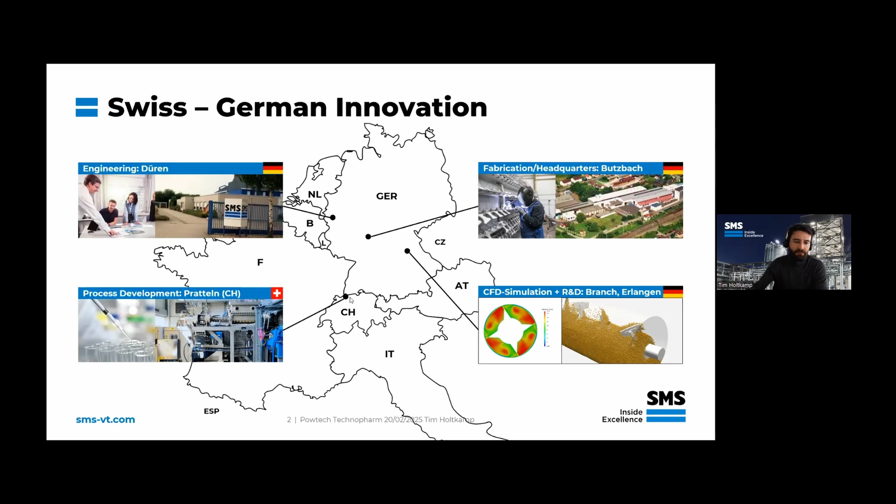That's where I'm located, where we have our process development. There we have our own laboratories where we can perform laboratory trials with our customers. We have even bigger metal pilot plants where we perform pilot trials for scale-up and further feasibility testing, and in addition, a partner lab where we can make analysis, as well as CFD and DEM simulation for accompanying analysis.

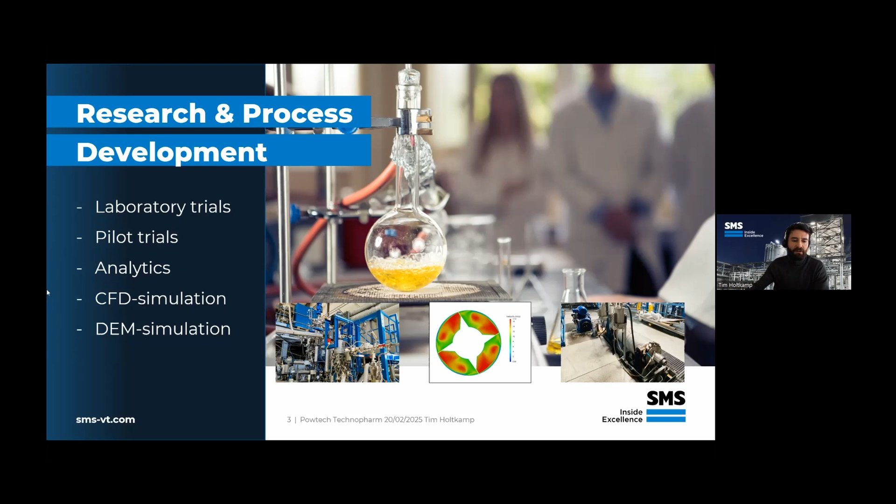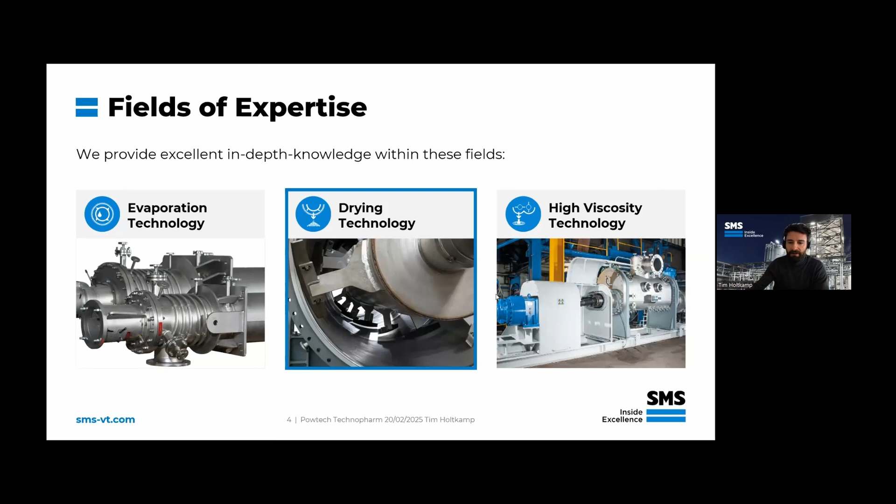We are also active in process equipment for evaporation technology with our thin film evaporators, and with equipment for the treatment or processing of polymers. But today we look at this drying technology, which is called contact dryer.

Since I think just a few people will know this technology, we will first look at the physics of it. Most of you probably know the kind of dryers you see here on the right side, similar to what Markel Alberdi from Econec just presented to us - the so-called convection dryer. This is a dryer you all know from everyday life - when you come out of the shower with wet hair, you take your hair dryer and blow hot air over your hair. The hot air saturates with water, the hair becomes drier, and then the wet hot air leaves the system. So this is a classical convection, or convective, dryer.

On the other side, on the left, you see our drying systems. We call them contact or conductive dryers. They do not use air at all - there's no inert gas here. What we have is the wet product brought into very close contact with a heated wall, for example a double-jacketed machine with thermal oil or steam in it. The heat is transferred through the wall by conduction into the product. The product heats up, and then the water, for example, starts to evaporate. Inside the dryer, we just have pure vapors and nothing else.

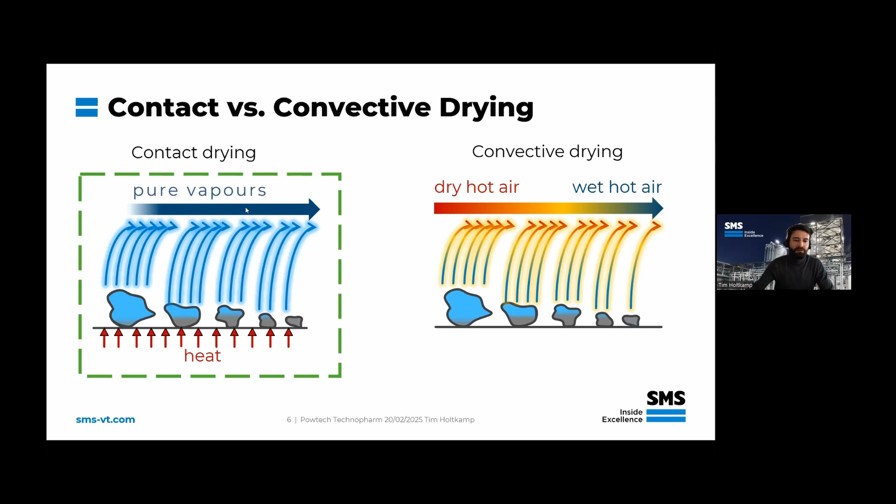So this supposedly small difference really has far-reaching consequences, and I will explain these consequences to you later.

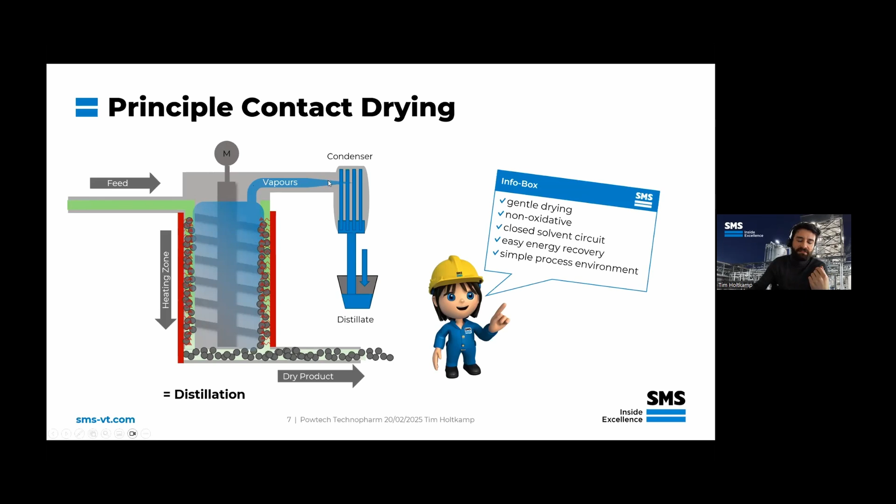Just to give you an impression of how a setup can look: with a contact dryer, we have, for example, a thin film dryer - a cylindrical machine with a double jacket where thermal oil is circulating. We have a feed nozzle where the wet product is pumped in, and an agitator that presses the wet material against the heated wall and pushes it down slowly, where it dries and then leaves at the bottom. The vapors go counter-currently in the other direction and can be externally condensed.

In both cases, you can try to recover energy. In our case, we can recover the latent heat completely, nearly completely, and also we have the full recycle of the solvent that we have just evaporated. This is only partially possible with convective dryers.

I looked into the literature and found the Bible of drying technology, K. Kröll's Trocknungstechnik, second volume, page 536. Here I found the complete energy balance, and you can see the streams for a convective drying system.

I took these values and simulated the same for a contact dryer to compare these two worlds. What I figured out is that the energy consumption in the convective dryer is approximately 14% higher, which is not as much as I expected, but it's still there, this difference.

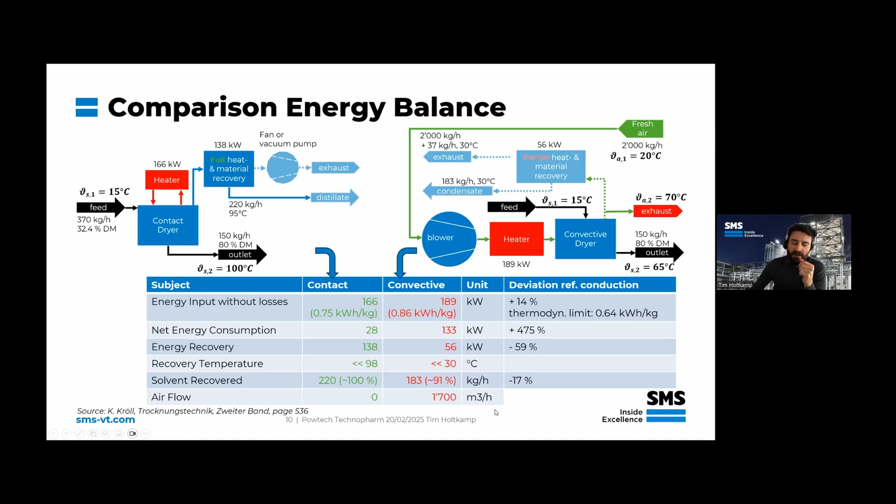In addition, we have this big stream of 1,700 cubic meters per hour of air, which is not present with our dryers. So how can we recover this energy? That's the big question of energy recovery.

We can implement our dryers in many ways. First of all, the vapors can be directly used, they have 100 degrees boiling point of water at atmospheric pressure, for example. So you can condense them anywhere, or condense them in a mixing condenser and then use, for example, 95 degrees Celsius hot water to preheat something elsewhere in your plant.

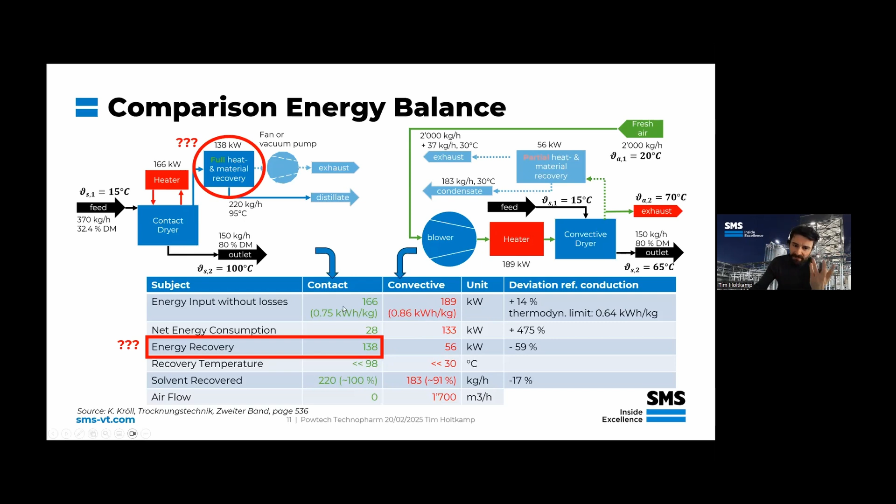But what I also wanted to tell you, which I think is very interesting, what is the future, because it can help you electrify your process, is using a heat pump. For example, on the left side you can see an open loop heat pump, or mechanical vapor recompression. You use the steam that comes out of the machine, maybe just part of it, and compress it with a fan or blower to a higher pressure level, for example to 160 degrees. Then you can use it self-sufficiently to heat your own dryer.

We have not yet done that actually, but I'm very open to talk with you about that. If you have possibilities or want to go this way, we are very open to go one step further into this future.

But you can also use, if you want, a closed cycle heat pump, the classical heat pumps you know from your homes, where your vapors are condensed inside the heat pump, and then in a secondary circuit you can use the pumped up heat for your own dryer or for somewhere else.

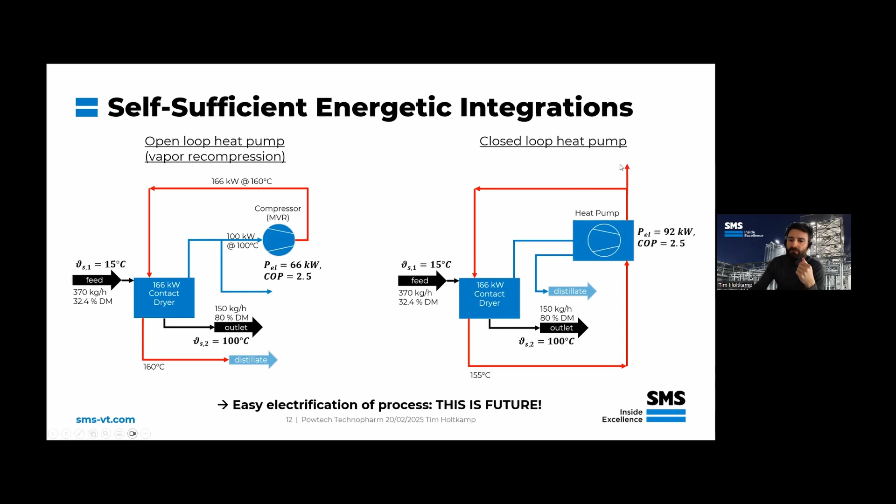So I've found two rules of thumb that can be applied when you want to validate the use of a self-sufficient heat pump system. I would say they pay off faster the smaller the dry matter amount is in your mixture that you feed into the dryer, and the further below 1 the ratio of price per kilowatt hour of electric to fossil energy is, including CO2 taxes, divided by the COP of the heat pump. That's so complicated, that's why here's the formula.

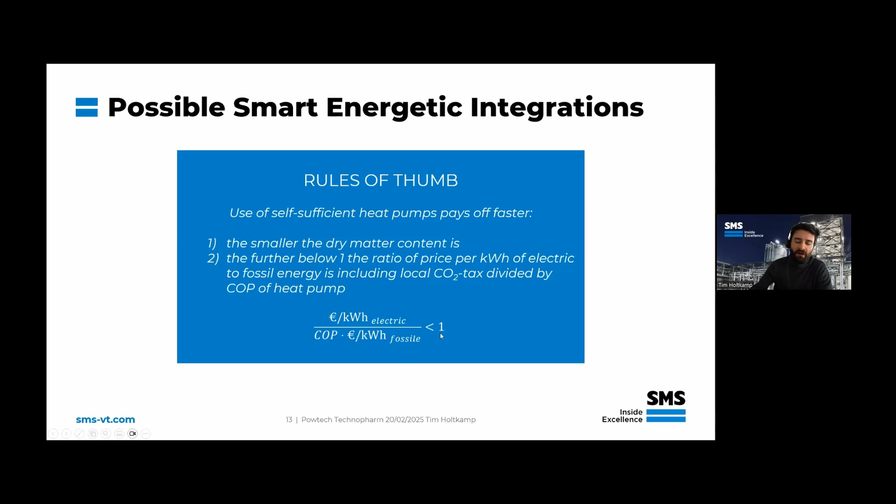Just divide the price for electric energy by the price of fossil energy. For example, this can be 2. Then you divide by the COP, the coefficient of performance of the heat pump, which, for example, if this value is 2, the whole ratio gives 1 — this would be the critical point where you'd say this doesn't make sense. But if the COP is bigger, which is very probable, then we are below 1, and you can really look deeper into this topic.

To summarize, our machines or dryers are a little bit like a distillation plant, like an evaporation system. So for us, it's very easy to have a vacuum process to lower the boiling point and make the process more gentle. We don't have oxidative stress because we don't have air inside our system. This makes the system pretty simple, pretty compact. The energy consumption is very good, and energy recovery is high at a high level of temperature.

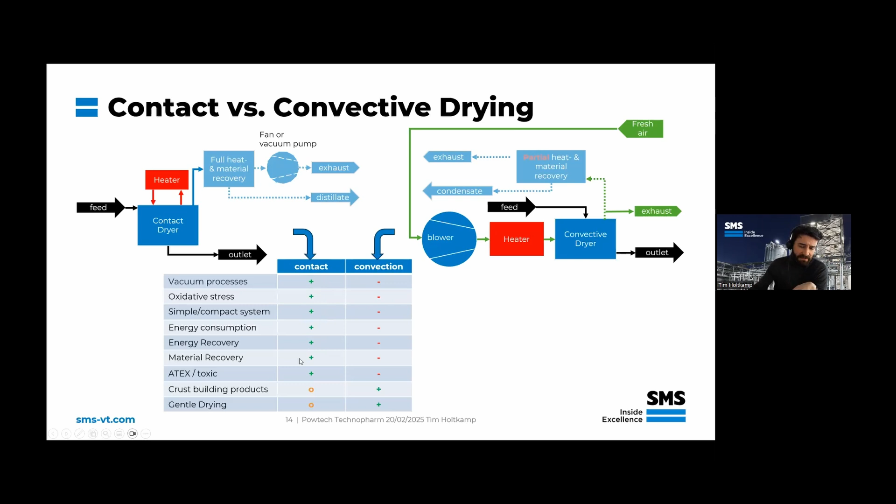Material recovery, so closed solvent circuit is nearly 100%, so that we can meet ATEX requirements or really toxic solvents or whatever is inside your product.

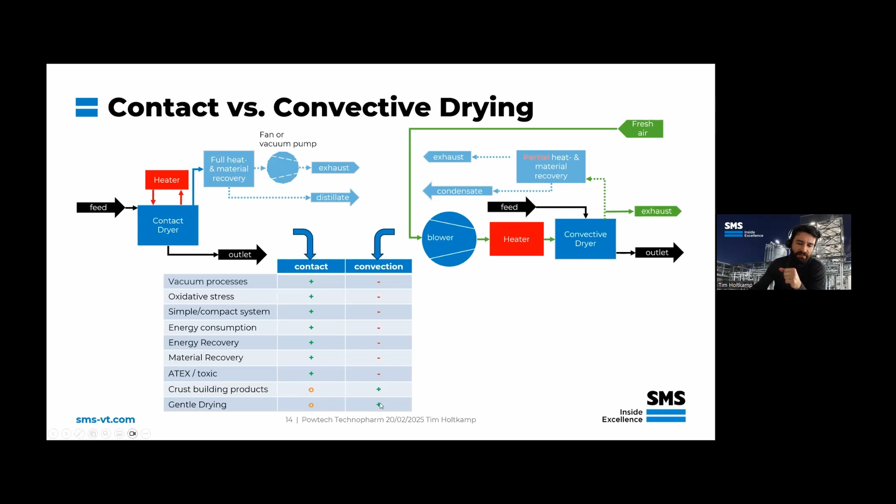Some neutral points, I would say, sometimes we have problems with crust forming products. Here I think convective dryers are much better. But we have also invented a very good solution to meet this problem, which I will show to you later. And in its very basic configuration, I think a convection dryer is a little bit more gentle with regard to the product temperature.

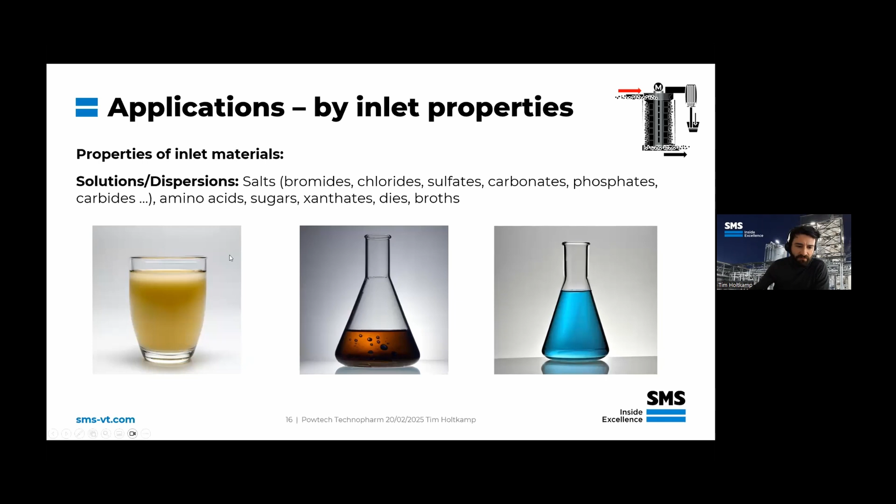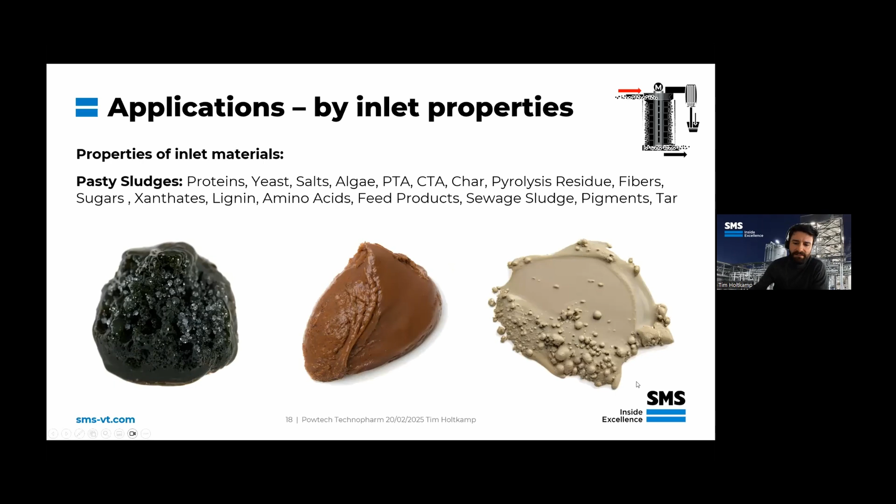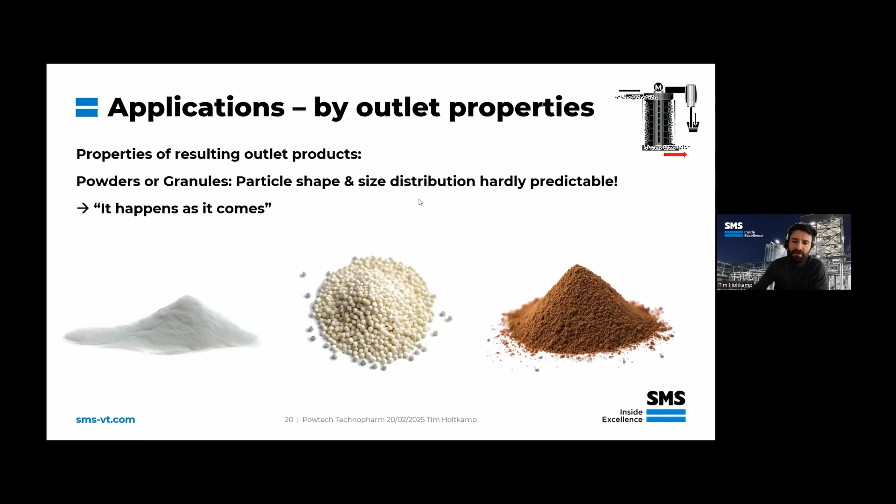So let's come to our dryers and the application of our dryers. We can feed into our dryers actually anything, everything you can imagine. So we can feed solutions, light solutions or dispersions that are completely liquid. We can feed liquid but pumpable slurries, no problem. But the critical things are then the pasty sludges. We can also, without any problem, feed them into our dryers, and they are then further dried, but also wet powders. And then what you get out from our dryers are in the end powders or granules. But unfortunately, we don't have really the control over the size and distribution of the particle size. We always say it happens as it comes in the end.

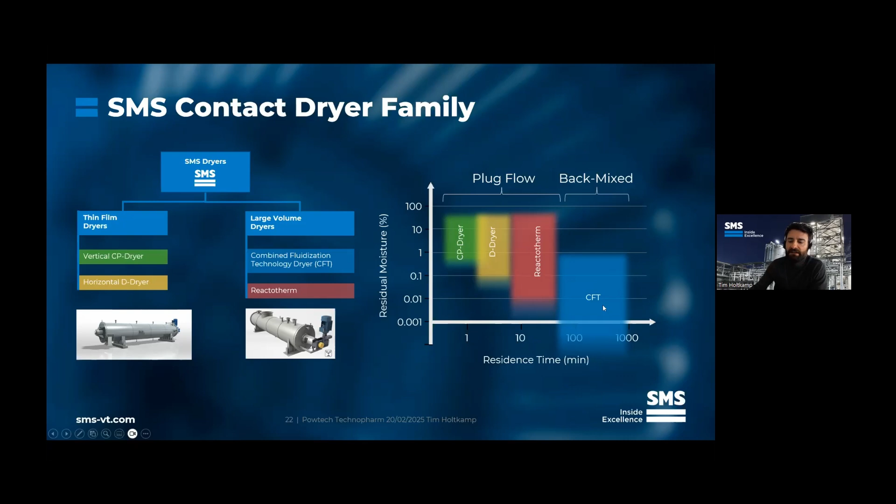The vertical and the horizontal thin film dryers have very short residence time and plug flow-like behavior. So residence time inside the dryers is really either a couple of seconds or just a few minutes. On the other hand, the CFT dryer is a backmixed dryer, so no plug flow-like behavior. Here we have residence times that exceed some hours.

Let's have a look at the low hold-up dryers, the thin film dryers. You can see here in the background a picture of the rotor of our vertical CP dryer. It's characterized by a flap rotor or pendulum rotor, as we call it. This CP dryer is very good for crystallization, for salt solution evaporation with sudden phase transitions. And we can feed into this machine liquid to light slurries.

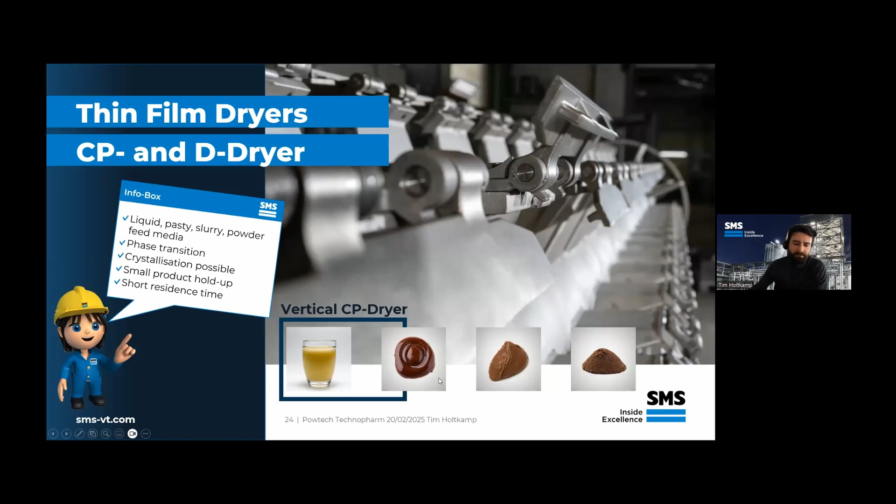On the other hand, we have our general universal weapon, our horizontal D-dryer. This can be fed with everything that is also liquid, but mainly pasty and dry powder, wet powder.

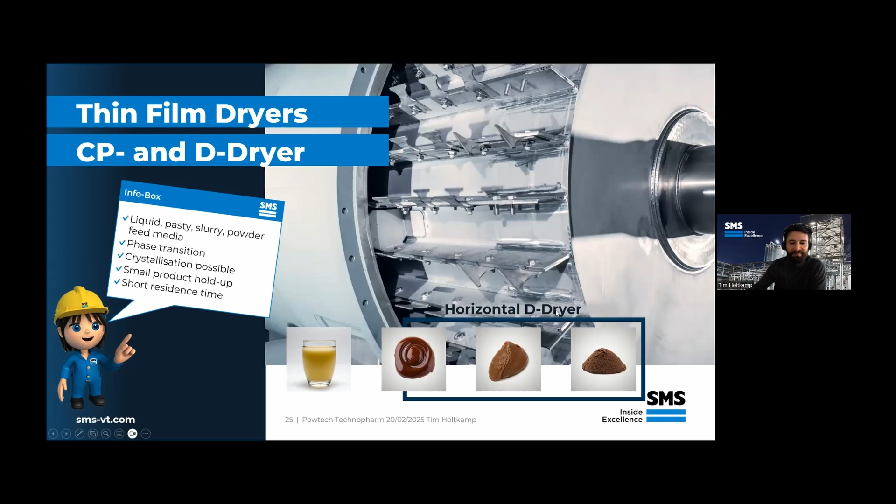The setup here, in this case, a horizontal D-dryer, is a classical distillation setup. You have the horizontal dryer with a double jacket, heating medium inlet and outlet. We have the feed, which can be realized with an eccentrical screw pump or a twin screw or a single screw. And the product will be fed into the dryer. The rotor takes it up and then pushes it to the right, and then it will be dried and falls out of the dryer with a rotary valve or a gate valve.

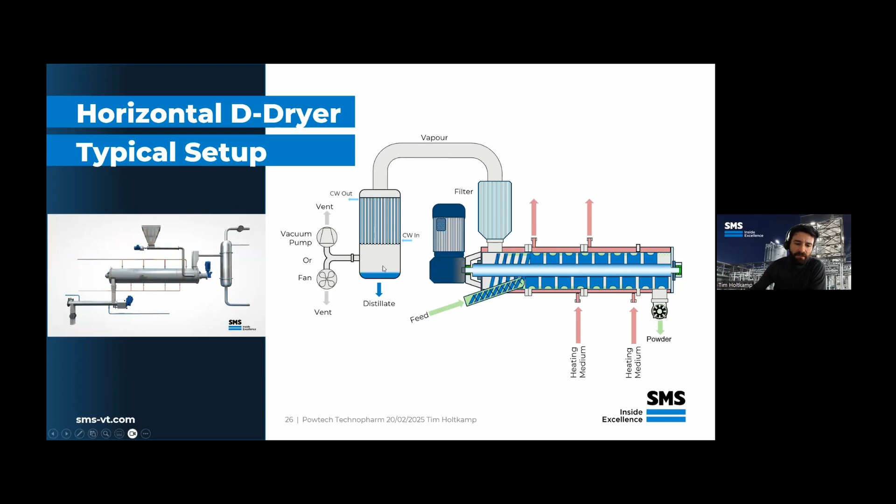Counter currently, the vapors will leave the machine, for example, through a dust filter, and then the vapors can be 100% condensed in a condenser. The same is true for the vertical machine, but just that the machine is vertical, so feed goes in the top and leaves dry in the bottom.

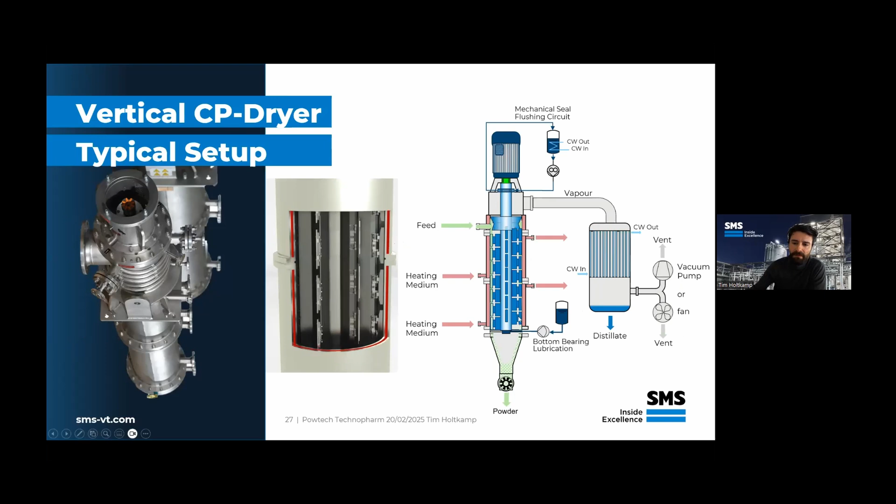The working principle of a thin film dryer is actually pretty simple, because the name already tells you that the rotor inside the dryer will form a thin film on the double jacketed internal of the shell, and then the heat will penetrate the metal, penetrate the product. We have here a remixing situation in front of the rotor blades, and then the product will heat up and start to evaporate.

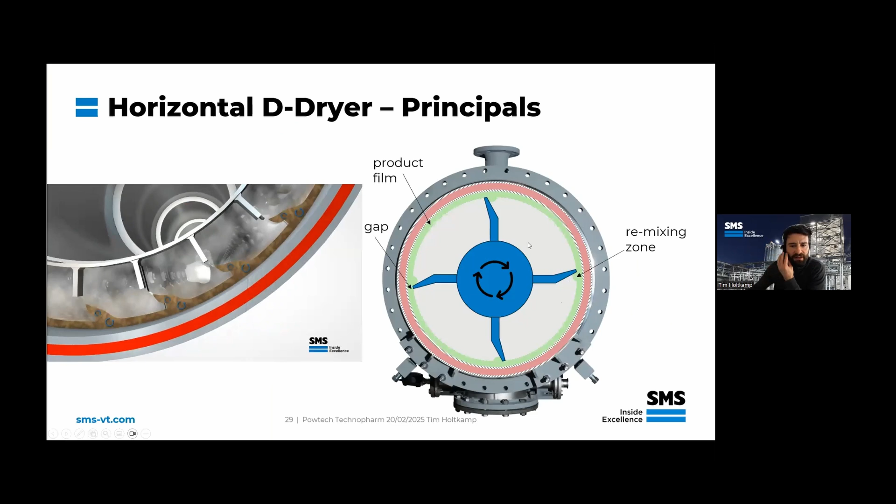The horizontal dryer has rigid elements or rigid rotor blades, whereas the vertical machine has pendulum rotor blades, which are very good for hitting crusts away.

Then we enter the first drying section, the superficial drying of the solvent. There we evaporate relatively temperature neutral, and then reach a critical point. This is the phase transition, from liquid to solid. We go through a very viscous, sticky phase, and then the horizontal dryer and vertical dryer take different paths. In the vertical machine, once the product is solid it won't stick to the wall anymore, it just falls down and leaves the process. Then the drying is over.

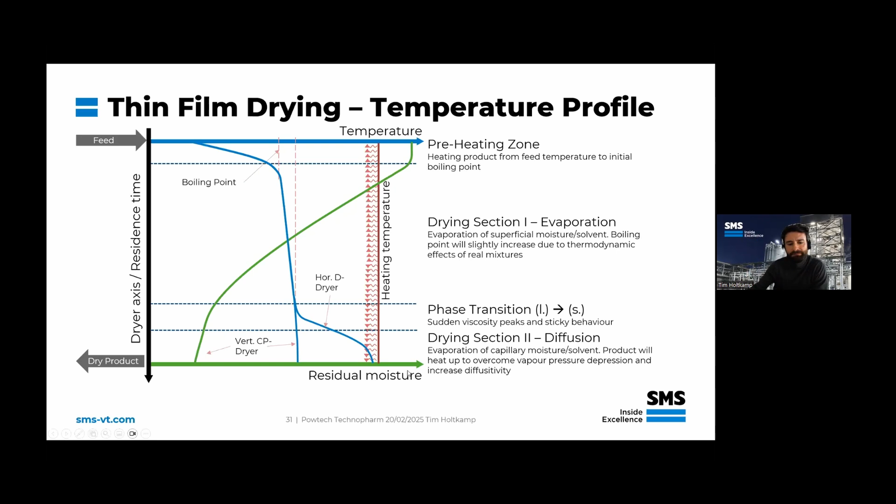Let's now go to the other class of large volume contact dryers, the large volume dryer, which we call the CFT dryer. That's very good for crust forming products, with liquid or slurry feeds. We have a direct phase transition inside the dryer. Granulation is possible here, and it's also ideal for poisonous waste streams.

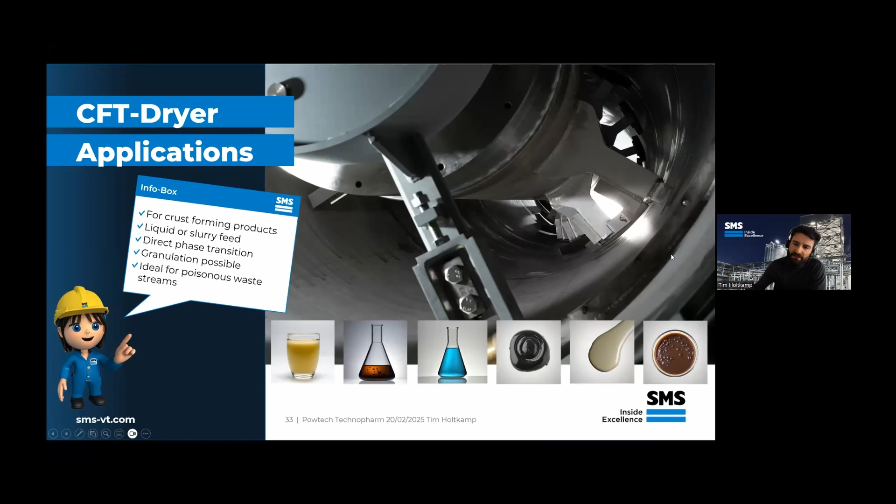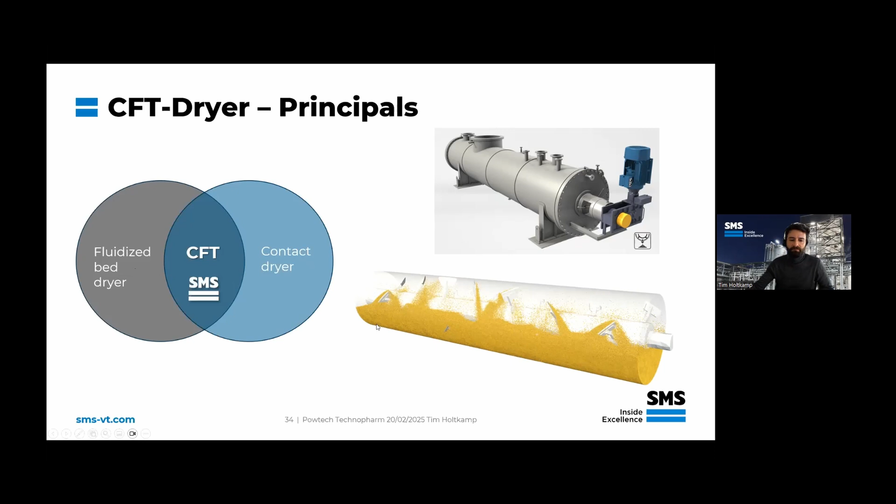So how does this work? We have, exactly like with the other dryers, a double jacketed cylindrical machine. We have a rotor inside that moves the pre-fill, the bed that is already inside the machine. Then we have inlet nozzles that feed directly into this hot bed. The moment the wet product reaches this bed, it will directly evaporate in situ in this very hot bed.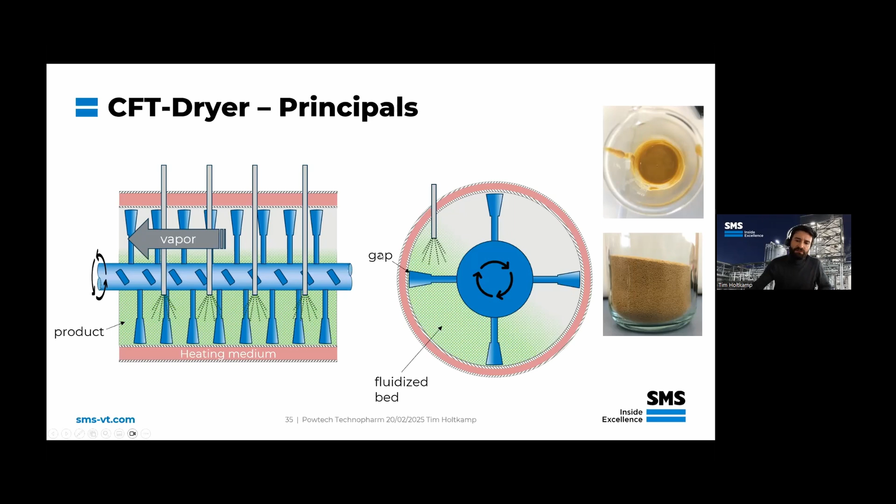The bed will locally cool down a little bit to provide the evaporation enthalpy, and then everything around is dry. This means before the sticky phase transition area touches or can touch the wall, it is already dried. This is why this kind of dryer is used for really crust forming products.